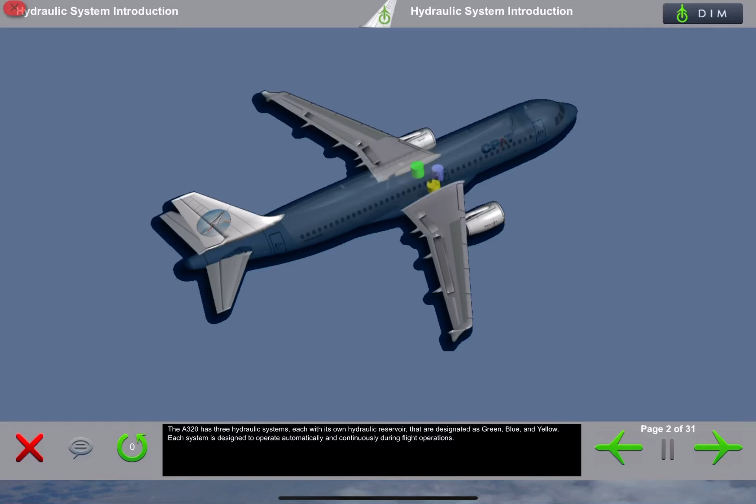The A320 has 3 hydraulic systems, each with its own hydraulic reservoir, designated as green, blue, and yellow. Each system is designed to operate automatically and continuously during flight operations.

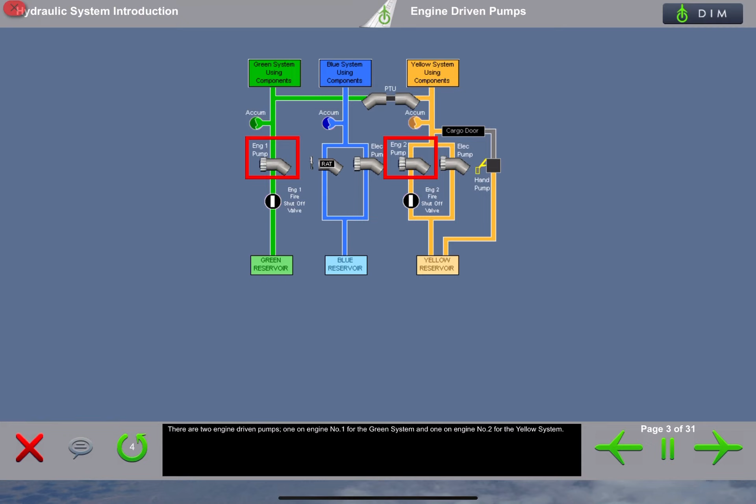There are 2 engine-driven pumps: one on engine number 1 for the green system, and one on engine number 2 for the yellow system.

There is a power transfer unit between the green and yellow systems that enables one system to pressurize the other if an engine-driven pump is inoperative. Hydraulic fluid cannot be transferred from one system to another.

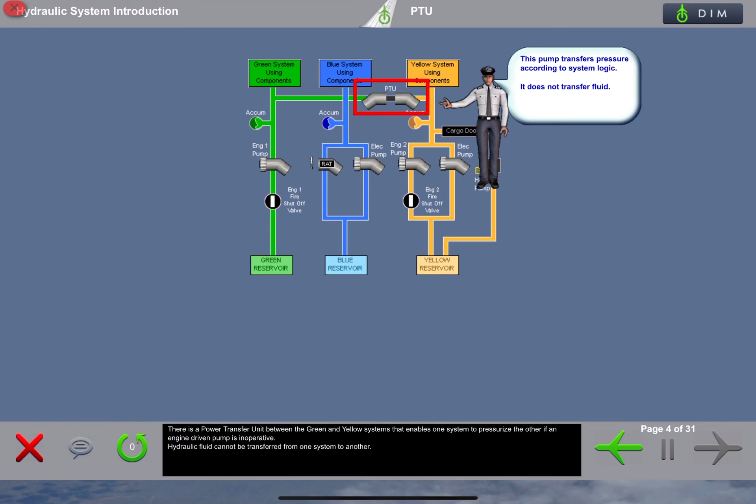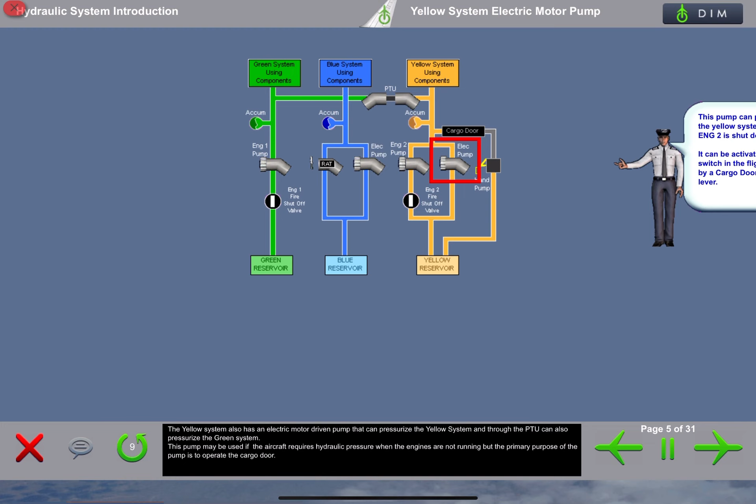The yellow system also has an electric motor-driven pump that can pressurize the yellow system, and through the PTU can also pressurize the green system. This pump may be used if the aircraft requires hydraulic pressure when the engines are not running, but the primary purpose of the pump is to operate the cargo door.

The yellow system is also equipped with a hand pump that allows manual pressurization of the system to operate the cargo doors when the aircraft is not electrically powered.

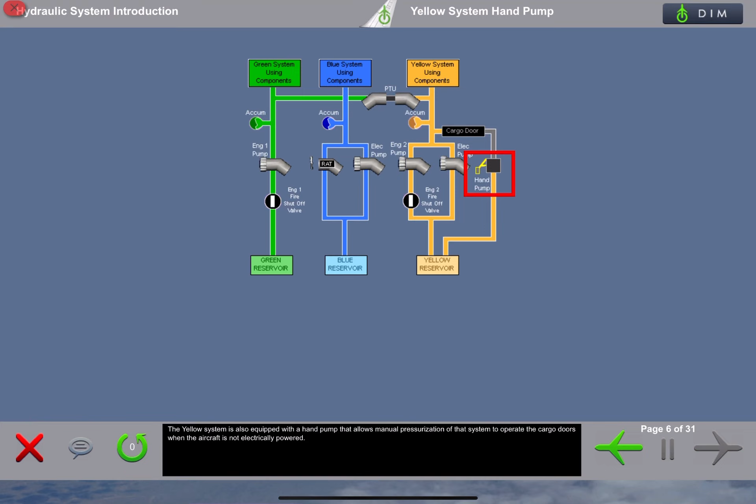The blue system is normally pressurized by an electric motor-driven pump, and during an emergency, the blue system can alternately be pressurized by the ram air turbine.

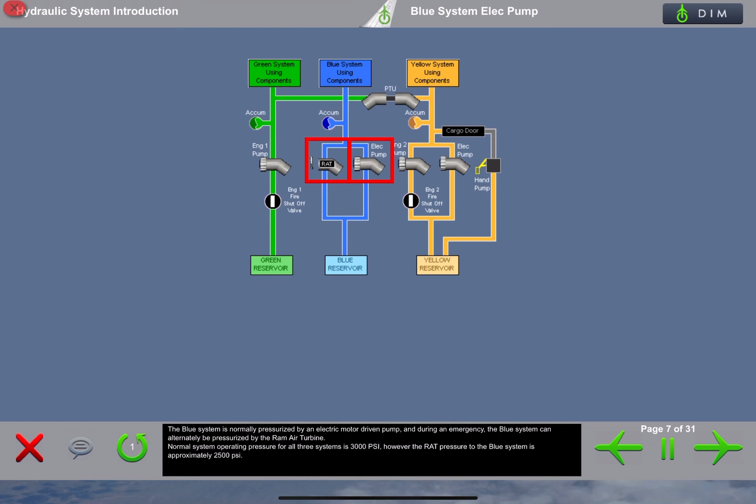Normal system operating pressure for all 3 systems is 3,000 psi. However, the RAT pressure to the blue system is approximately 2,500 psi.

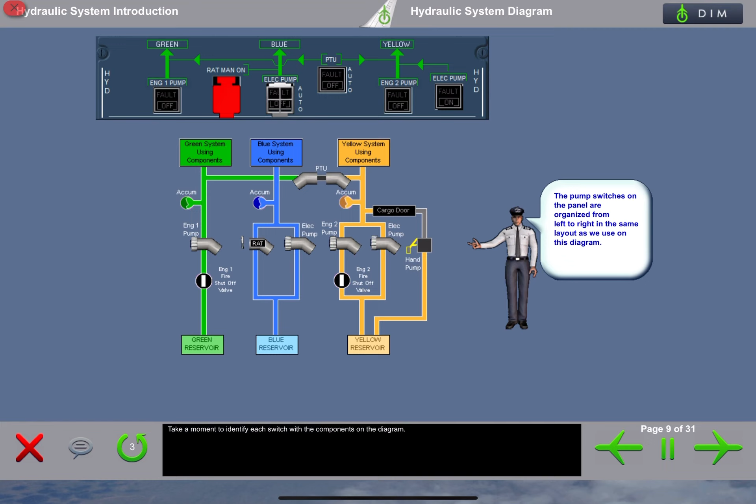The controls for the hydraulic system are on the overhead panel. Take a moment to identify each switch with the components on the diagram.

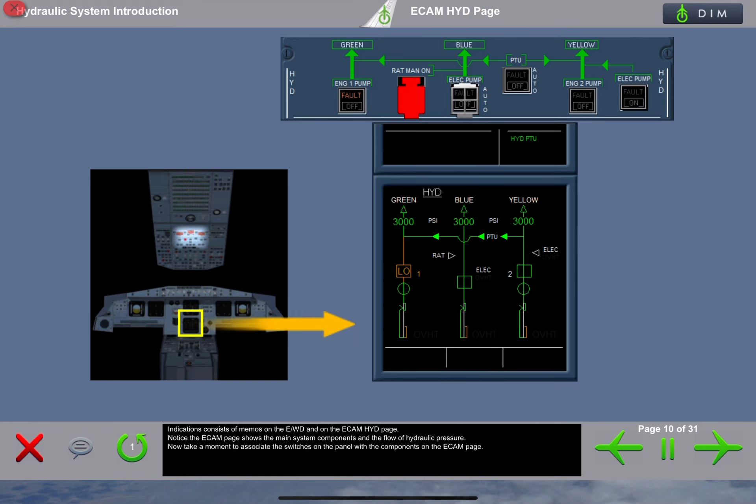Let's look closely at each system in more detail.

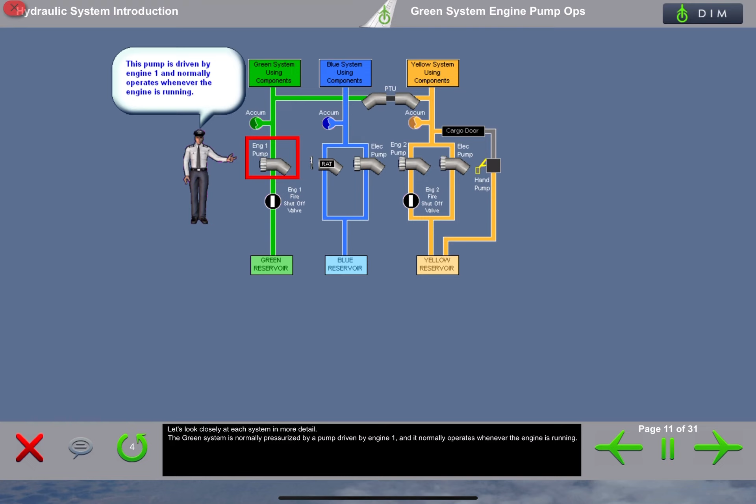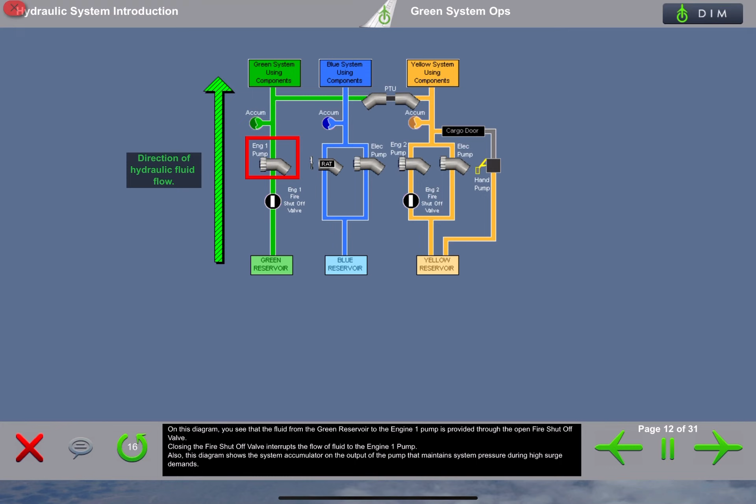The green system is normally pressurized by a pump driven by engine 1, and it normally operates whenever the engine is running. On this diagram, you see that the fluid from the green reservoir to engine 1 pump is provided through the open fire shutoff valve. Closing the fire shutoff valve interrupts the flow of fluid to the engine 1 pump.

Also, this diagram shows the system accumulator on the output of the pump that maintains system pressure during high surge demands.

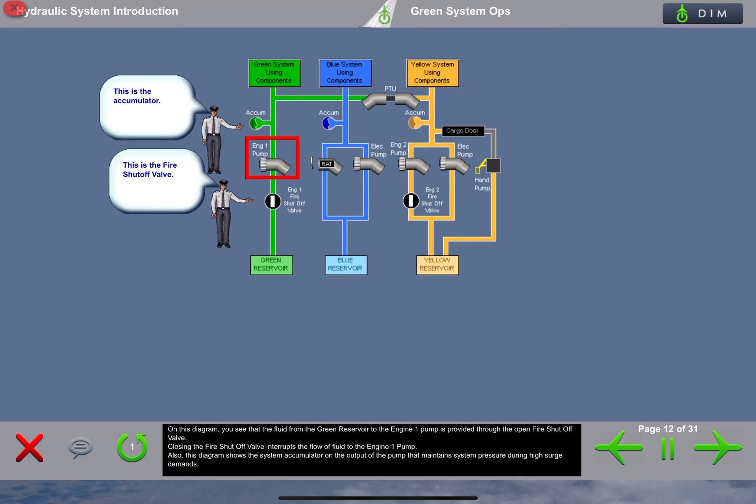The blue system is normally pressurized by an electric pump. However, in an emergency, a pump driven by a ram air turbine can pressurize the system.

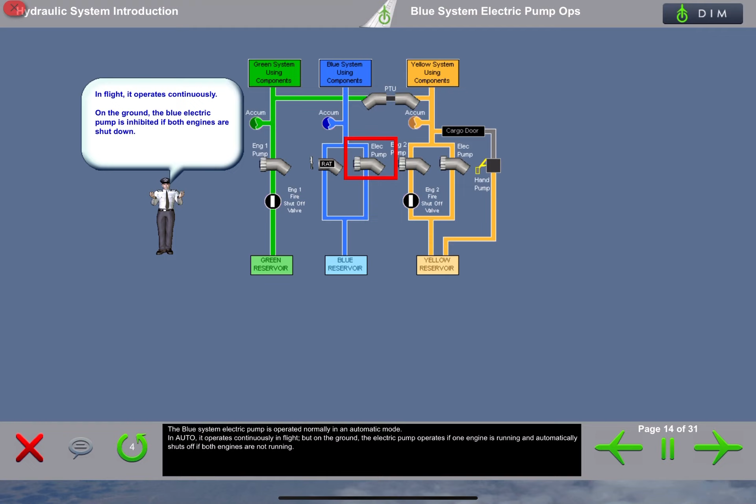The blue system electric pump is operated normally in an automatic mode. In auto, it operates continuously in flight, but on the ground, the electric pump operates if one engine is running and automatically shuts off if both engines are not running.

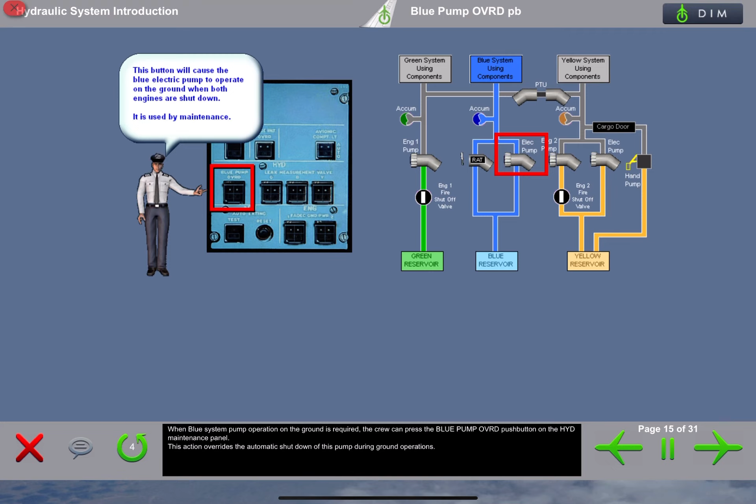When blue system pump operation on the ground is required, the crew can press the blue pump override push button on the hydraulic maintenance panel. This action overrides the automatic shutdown of this pump during ground operations.

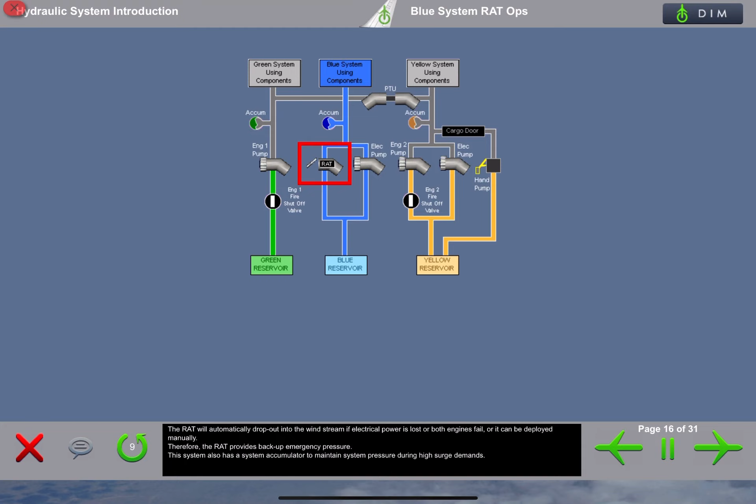The RAT will automatically drop into the windstream if electrical power is lost or both engines fail, or it can be deployed manually. Therefore, the RAT provides backup emergency pressure. This system also has a system accumulator to maintain system pressure during high surge demands.

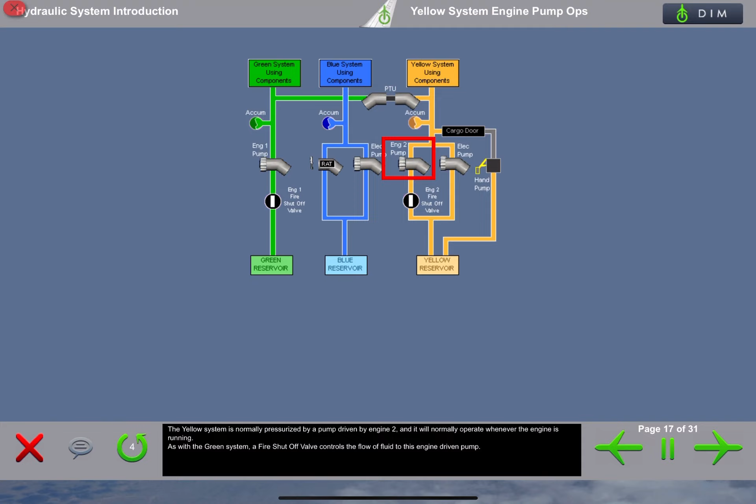The yellow system is normally pressurized by a pump driven by engine 2, and it will normally operate whenever the engine is running. As with the green system, a fire shutoff valve controls the flow of fluid to this engine-driven pump.

An electric pump is installed that can be selected on to provide yellow system pressure. As with the other 2 systems, a system accumulator maintains system pressure during high surge demands.

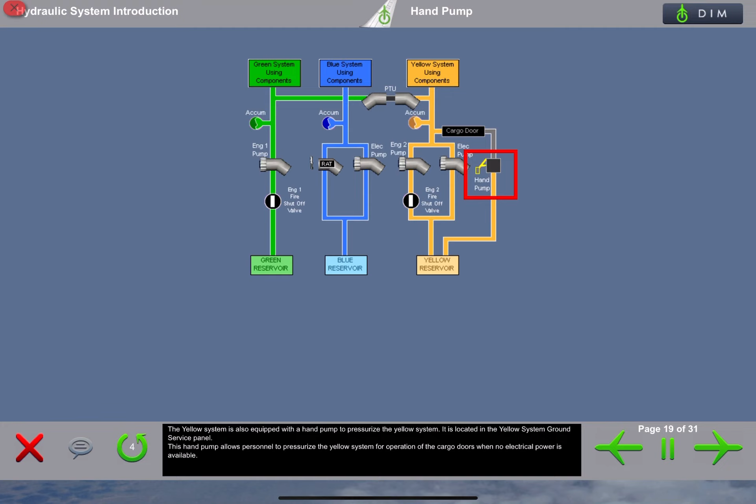The yellow system is also equipped with a hand pump to pressurize the yellow system. It is located in the yellow system ground service panel. This hand pump allows personnel to pressurize the yellow system for operation of the cargo doors when no electrical power is available.

A bidirectional power transfer unit enables the yellow system to pressurize the green system and vice versa.

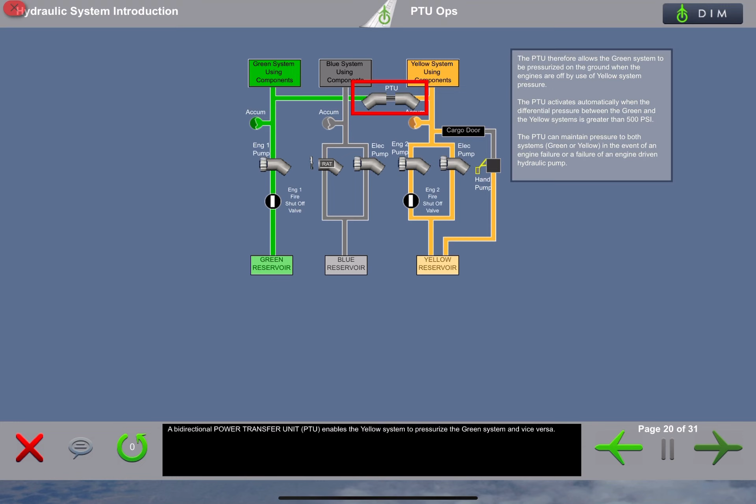A pressurized reservoir provides the motivation to keep positive fluid flow to the hydraulic pumps. Without pressure, the pumps may cavitate at higher altitudes.

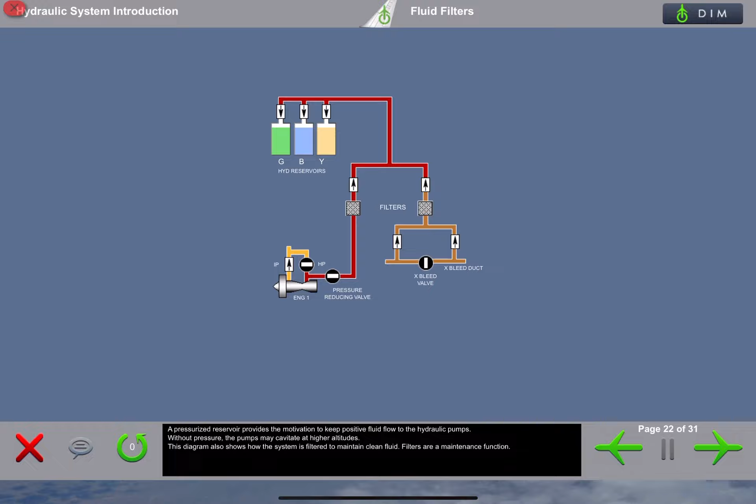Let's look at the system distribution to the using components. The first thing to point out is that the heavy load users are drawn at the top of this diagram, just above the priority valves.

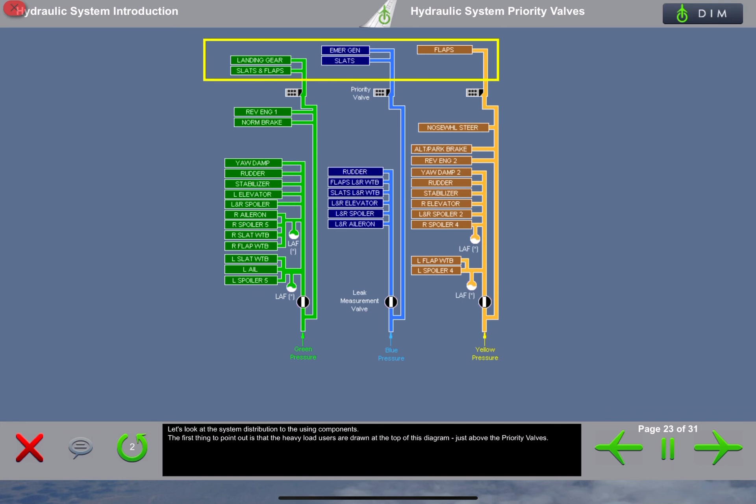A priority valve will close to cut off pressure to the heavy load users if the respective system pressure is low. This feature maintains pressure for the other higher priority components, such as primary flight controls and wingtip brakes for flight operations, and reversers and brakes for ground operations.

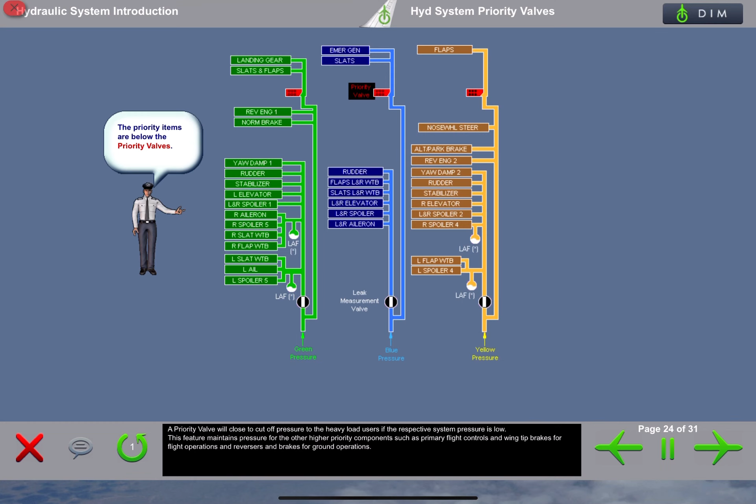On this frame, you should familiarize yourself with the source of pressure for the various components. Notice that many items are pressurized by 2 or more systems.

Finally, notice that the emergency electrical generator is pressurized by the blue system, and it is a high load item on that system.

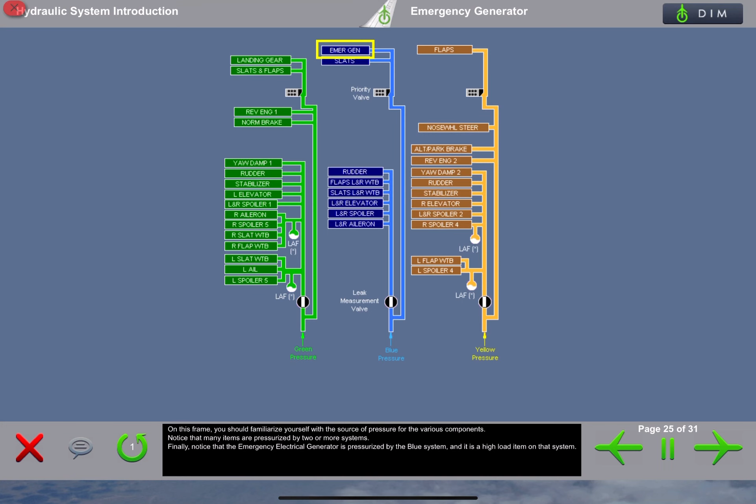Before we leave this diagram, we'll describe the leak measurement valves. Each leak measurement valve measures the leakage in each system. Each valve can be manually closed by the operation of the leak measurement valves push button on the maintenance panel. These push buttons are for ground maintenance only.

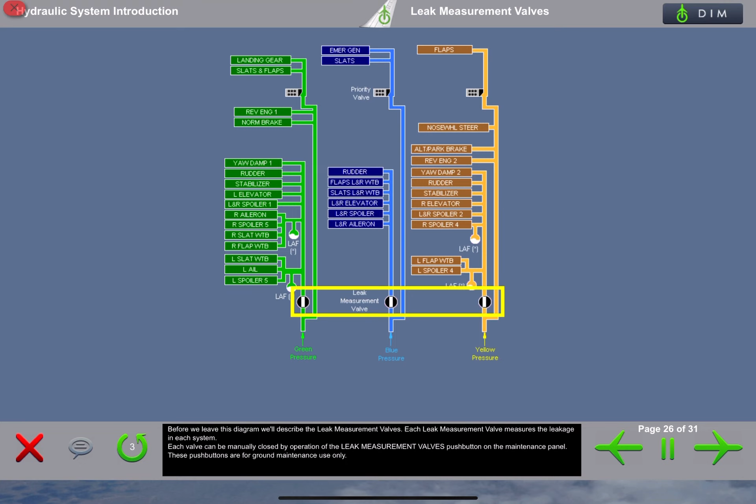Okay, that completes our introduction to the A320 hydraulic system. Let's answer some questions.